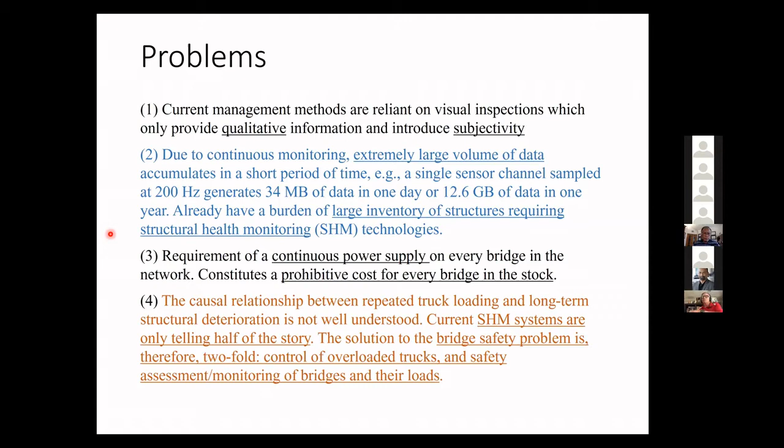Another problem with the current health monitoring system is it only tells you half the story. It gives you information about the health of the bridge, but it doesn't give you the other part of the equation, that is the load itself. And another issue is that once you have the health monitoring system in place, not only is it expensive, it takes time, and you cannot easily remove it and take it to another site.

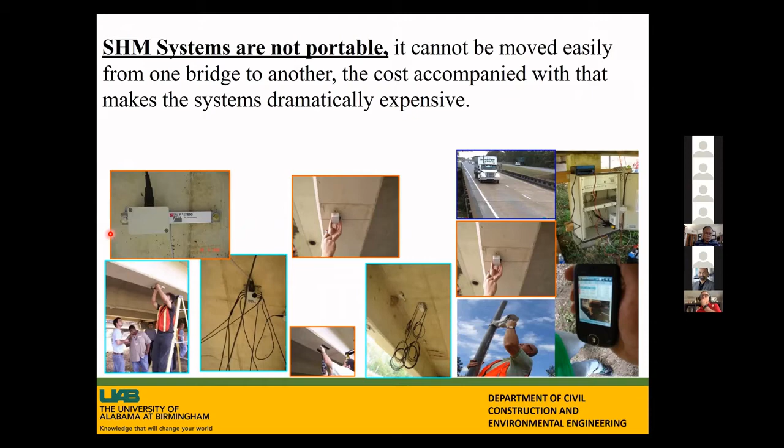So in order to overcome all those challenges, especially the bottleneck of requirement of power supply, the large volume of data being generated, and lack of establishing relationship between the load and the health, we designed a cyber physical system. This is how the system works: you have this sensor in place. And what we did, we set up a landing pad where a drone can fly and sit on it, and it charges all the sensors on the bridge site. And then it also downloads the data.

So it solved these two major problems. One is the power problem, because now you don't need any source of power, because the drone comes every now and then and it charges the battery of the sensor, wakes it up, and then the sensor continues collecting the data. It also solved the data problem because you're not collecting the data all the time. You only collect the data as you need, and the drone comes and collects the data and goes back.

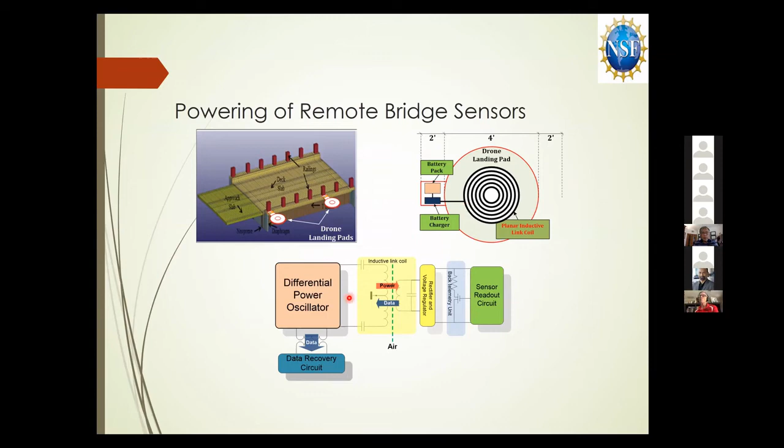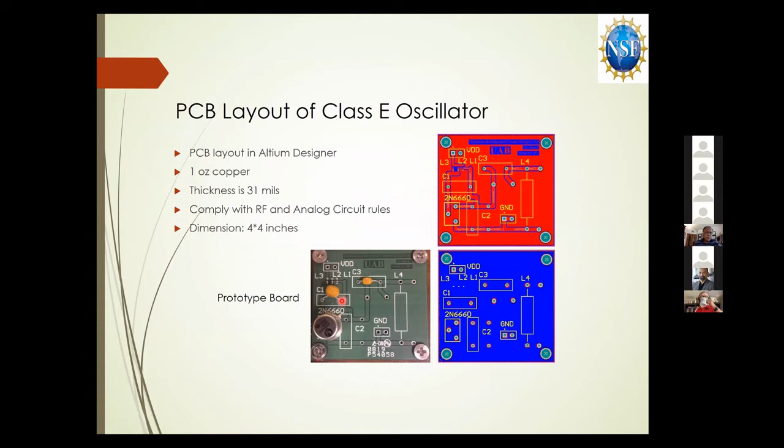So this was a really very interesting problem, and we had to solve this landing pad problem, which is able to not only charge the sensors, but also allow the drone to collect the data. And this is the device that we designed. This is how the landing pad looks, and it has this sensor readout circuit. It has a data recovery circuit, and this is the PCB layout of the oscillators. This is the design and also the prototype board that we manufactured. And this is a receiver unit. We proof tested in the lab, and we could successfully demonstrate that this system works.

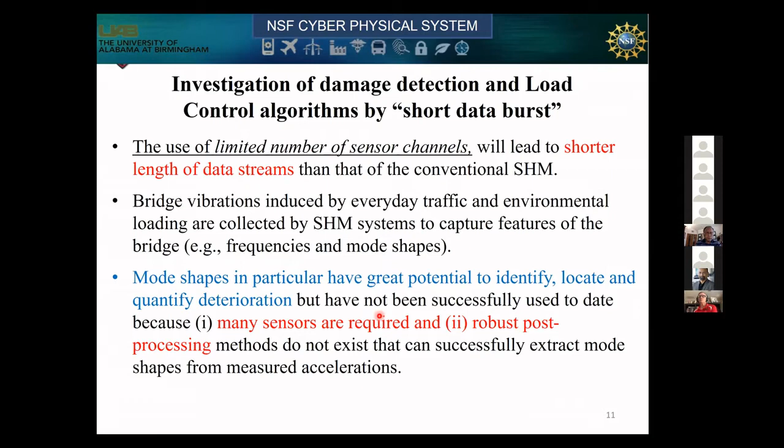But as we solved this large volume data problem, moving into as-needed data collection, it creates another set of problems. The problem is now we have a very limited number of sensor channels, and the data length is shorter than the conventional health monitoring data. As you know, in order to detect the damage in a bridge, you need to establish a very accurate mode shape, and you need many sensors and robust post-processing. So to overcome these challenges, we moved on to the next level of research.

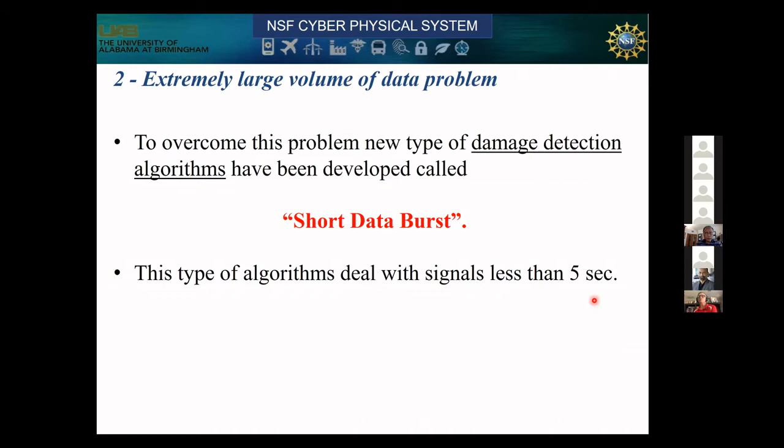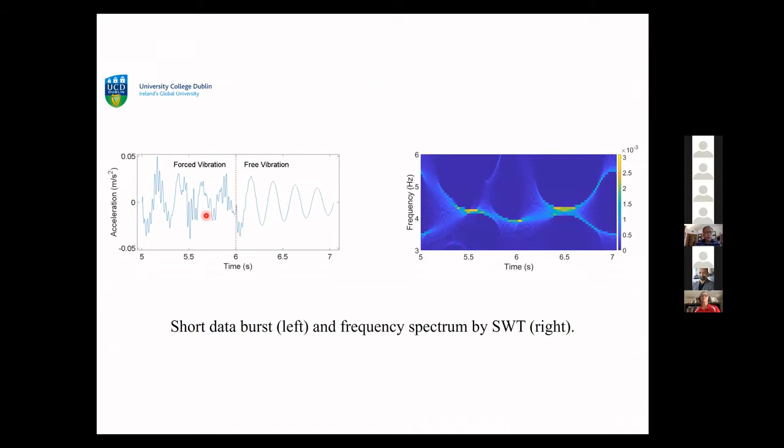It's the damage detection algorithm using the short data burst, meaning a signal that has a duration less than 5 seconds. And the way we handle that, so this is a very short, 1-second duration data, followed by free vibration data. So we had to compensate for the shorter duration so that we get a similar level of damage detection data that a traditional health monitoring system provides. And the way we do it, we extend this data artificially by padding.

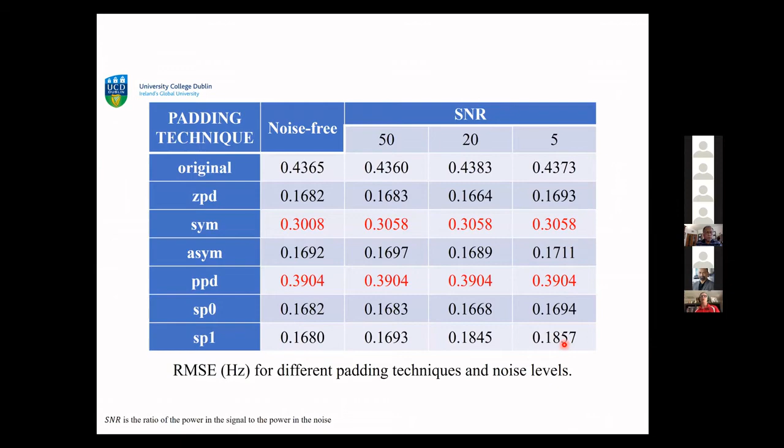Even when we inserted noise into the signal at a very high level, as high as SNR equal to 5, still most of the padding techniques give you an acceptable level of accuracy. So establishing that was a major hurdle for us to overcome. We are actually focusing on some discontinuity issue between forced and free vibrations.

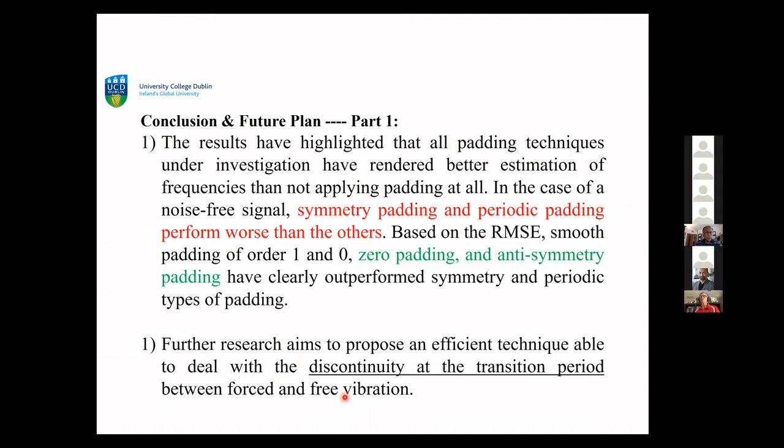Now that we have the power supply problem resolved, data problem resolved, how do we solve the relationship between the loading and structural deterioration that is completely absent in today's health monitoring systems? So again, we look into the same scheme we just developed, but this time we want our sensor not only to give us information about the health of the structures, but also to give us the weight of the truck moving through the bridge. And we call it bridge weigh-in-motion.

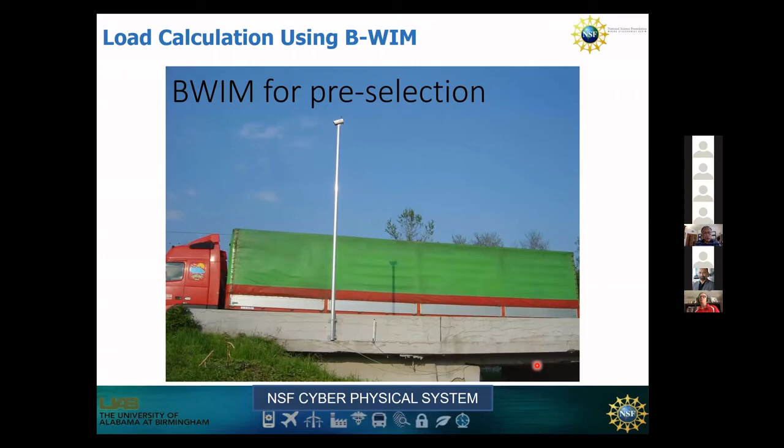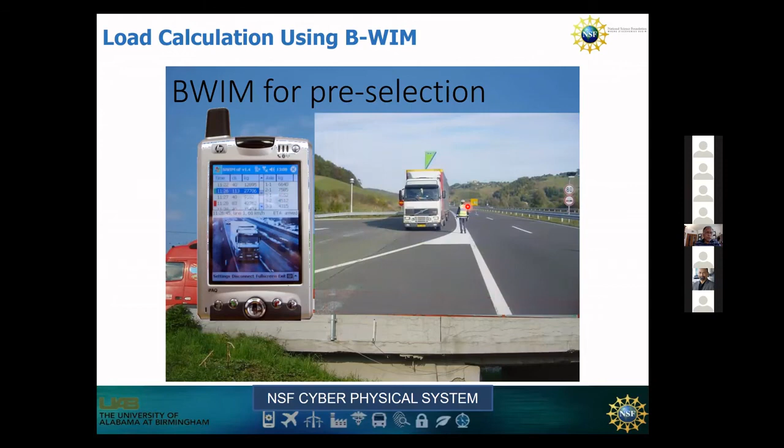This is how it works. So this is the sensor we have below the girder. As the truck goes by, we have a weigh-in-motion algorithm that, based on the strain data, calculates the weight of the truck. And then in real time, it sends the information to a smartphone. And if it's enforceable, the police can actually give it a ticket. But our goal actually was getting the weight information about the load of the truck.

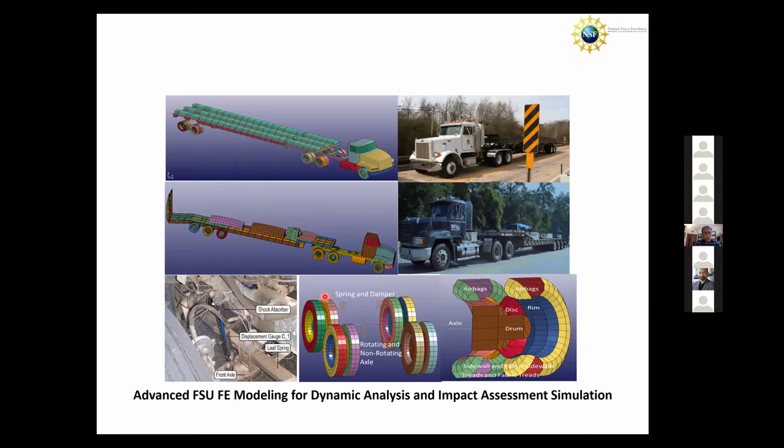So to make it practically possible, we had to get into some high fidelity simulation of the vehicles that includes a serious level of detail in the tire, in the suspension, just to show you some calibration that we had to do. Like for example here, this is the proof test of the suspension systems that was as good as experimental. So we really had to resolve those kinds of details in order to make it workable.

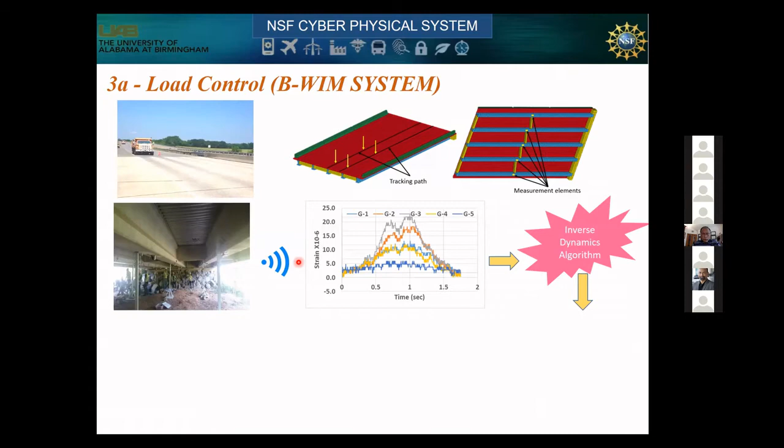And this is really the field test in Georgia that we did. So as the truck goes by, our algorithm works, so we have this wireless strain gauge and accelerometer that gives you real-time data. And in the real-time algorithm, we could calculate the weight of the truck with very reasonable accuracy, less than 3% error, both at the gross weight level, which was a very small error, and even at the axle levels we got a very good weight.

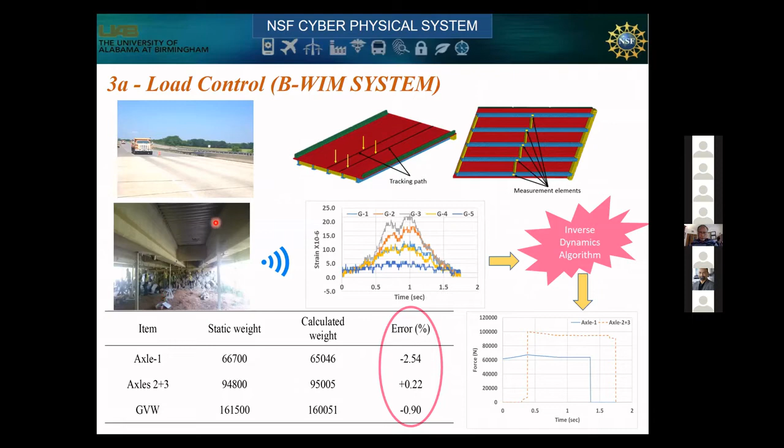Now, all of a sudden, the system that we are proposing not only gives you the information on the health of the girder and the bridge, it also gives you the information on the weight of the load moving through the bridge. So now you have a complete picture of the problem.

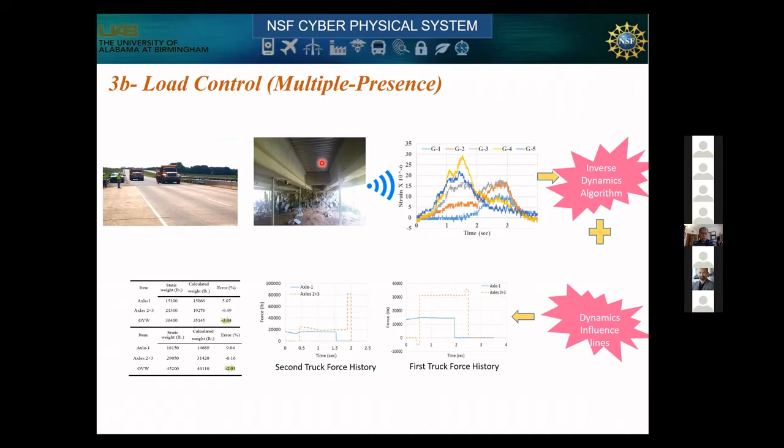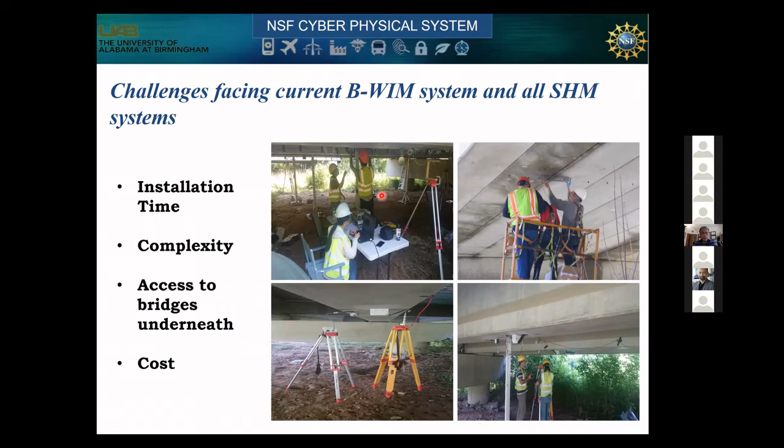However, even though this scheme that I proposed solves the problem of the power, the problem with the data, and the problem with the interaction between the load and the health, still the installation of this kind of system is very problematic. Not only does it take a lot of time, it has a lot of complexity to get it right, and accessing the bridge is another challenge. Of course, cost is very prohibitive. So the next challenge we took: can we really get away with all this mess and make it simple, cost effective, and really reasonable?

So the way we have to do it then, we have to somehow replace these wireless strain gauge sensors with something else. And we have to get away with all that installation time. How can you do that? Well, the drone was the solution. So imagine if we have a drone instead of a sensor that flies with a small accelerometer like this and attaches, like what we see in the Stanford experiment, then instead of collecting the strain gauge in real time, you collect the acceleration in real time.

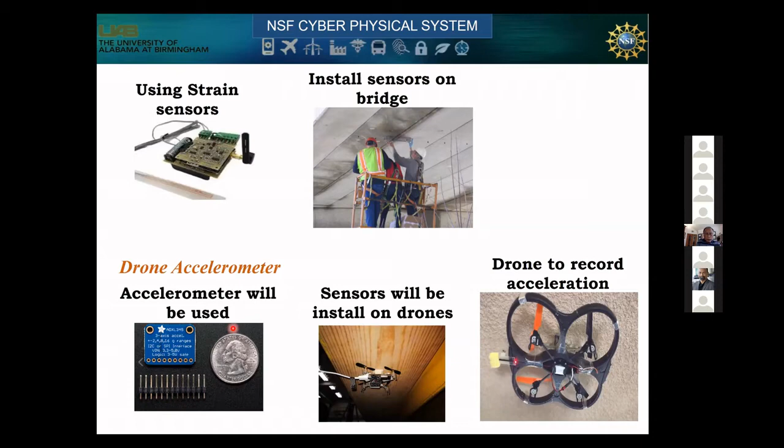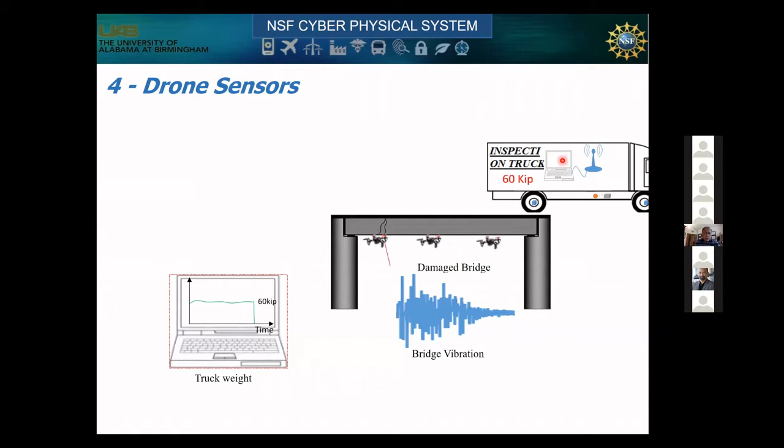And does it work? So then you get away with installing these heavy duty sensors and all that manpower and expensive effort, just letting a drone fly, attach to it, and you're done. Is it possible? But the challenge is then, how can you replace that size of sensor with small sensors and still get good results? So again, as you see, the idea was that those drones are going to fly out, attach themselves to the bridge, and as the truck goes, give you the weight of the truck and at the same time the health information.

So the challenge is then to get a very good acceleration, because if you move from strain gauge to acceleration, then bridge vibration is very sensitive. So your vibration signal has to be very good. So if you use a Silicon Designs, which is very expensive and heavy duty, it's going to give you a very good vibration signal.

But if you want a drone with an accelerometer, like the small sensor you have in a smartphone, then it's not going to give you as good data as this Silicon Designs sensor is going to give you. So it is impossible to get good data that's going to be useful to get the weight of the truck and the health of the bridge.

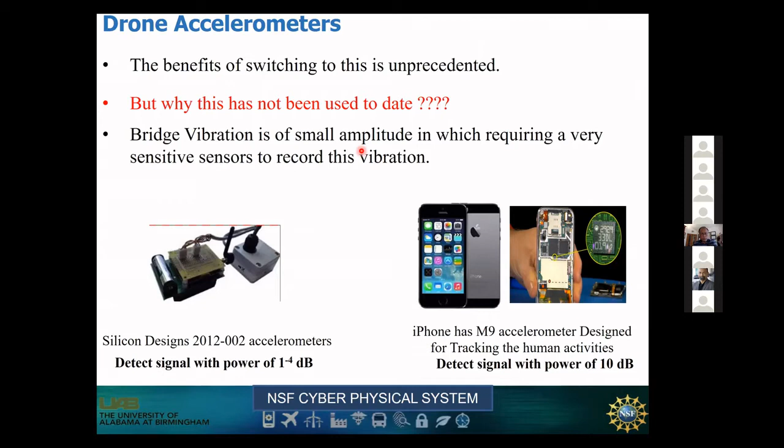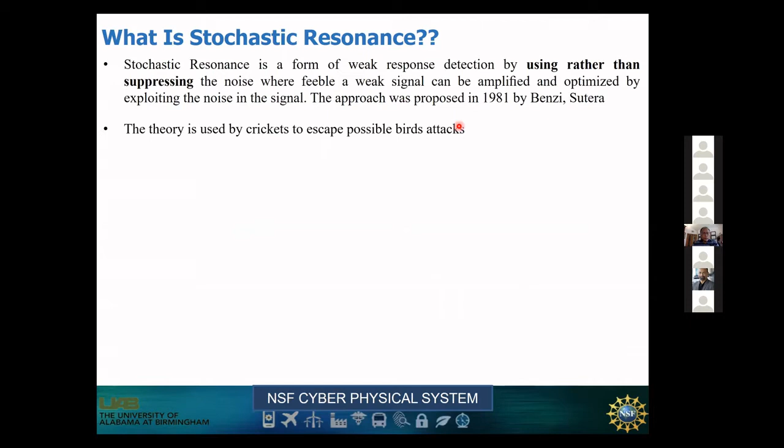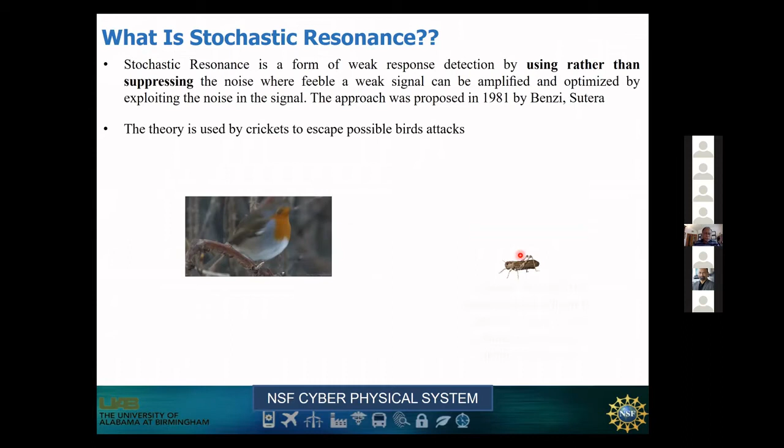So the way we do it, we use a stochastic resonance algorithm invented by Benzi, and he was inspired by how the cricket escapes a bird attack. To explain what that means, his algorithm was developed based on the cricket. When it sees a bird, it sends a signal to the bird, and the signal comes back. The signal the cricket is looking for is the signal from the bird, and that is very weak compared to the environmental vibration. So it artificially tunes it, amplifies it, and understands that the bird is flying towards it. So it's happy and runs away, right?

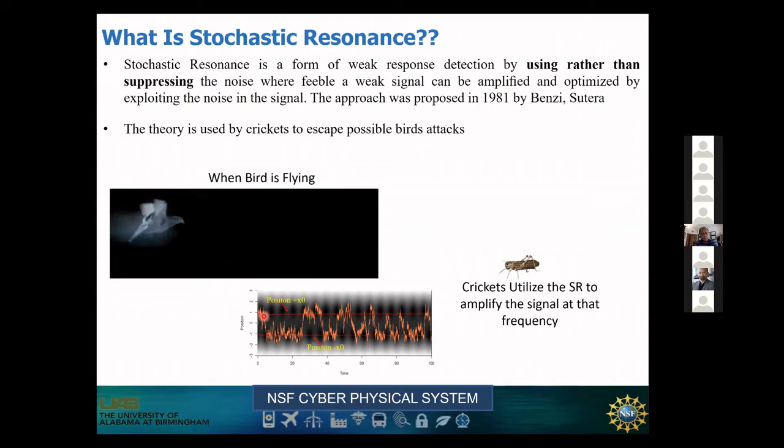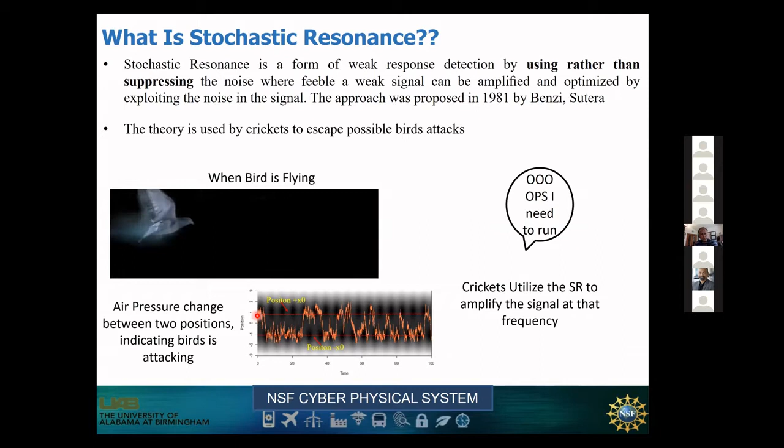But if the bird is coming towards the cricket, again it utilizes stochastic resonance and amplifies the weak signal coming from the bird that it is looking for. And now it can see the two pressure signals from the two wings of the bird, anticipates the problem, and runs away. So this intriguing theory was understood by Benzi, and he developed this idea of tuning up the weak signal with a resonance algorithm, amplifying it so that you can get good data. That involves the movement of a heavily damped mass in a specific potential well.

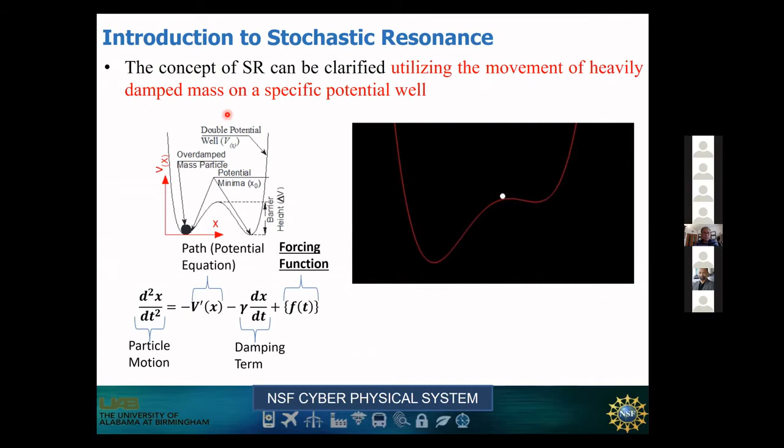So based on that theory from Benzi, we developed our algorithm. We now have this noisy signal from the smartphone sensor. Then we are able to noise-tune the weak signal we are looking for using stochastic resonance, and we were able to extract that weak signal successfully.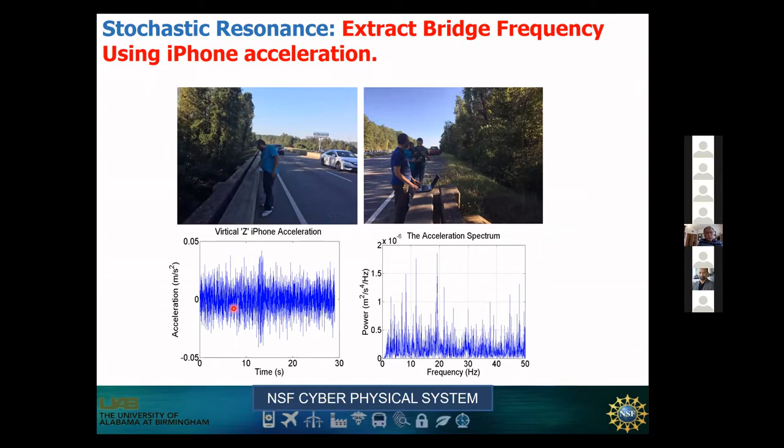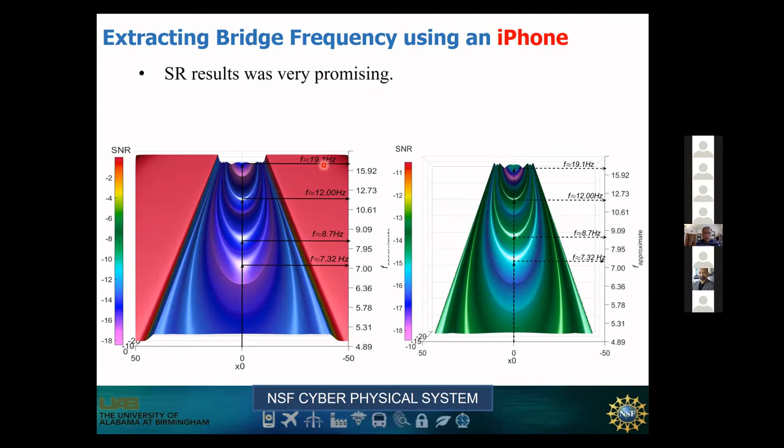To give you a practical example, this is a bridge that we are investigating, and these are my students. They are putting the smartphone not on the bridge or underneath the bridge, just on the guardrail. Putting it on the guardrail, we got this noisy signal. But once we applied the algorithm, we see that the bridge frequency we observed is nearly 100% accurate compared to the actual bridge vibration. So 100% matched. And this is some of the comparison between the extracted signal and the first bridge frequency, and you can see the accuracy is almost 100%.

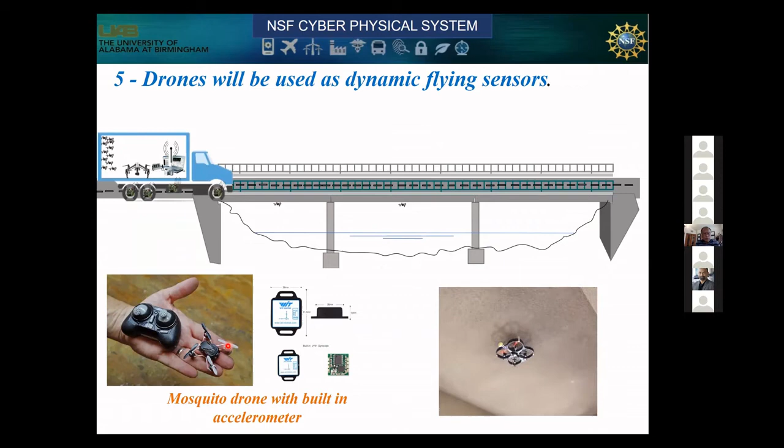Now that we could do that, we have a system where we can have the drone with an accelerometer. As you can see how small this drone is, it has inside it this very little smartphone sensor, and it can fly in. Now, by attaching itself to the girder, it can give you not only the information of the weight of the truck, it will give you the health of the bridge. So that kind of sealed the deal.

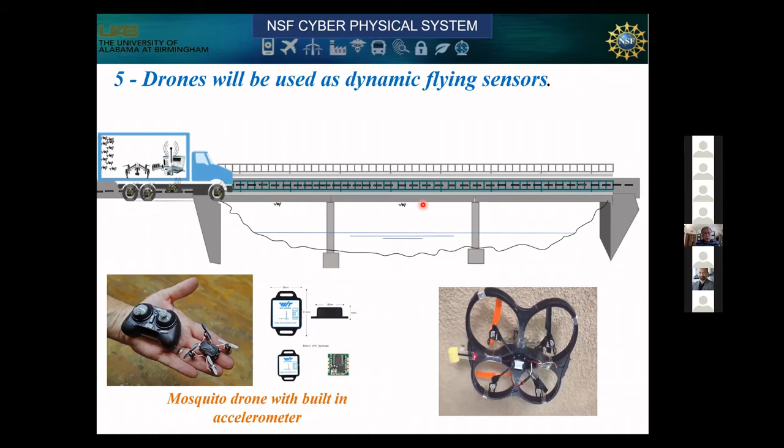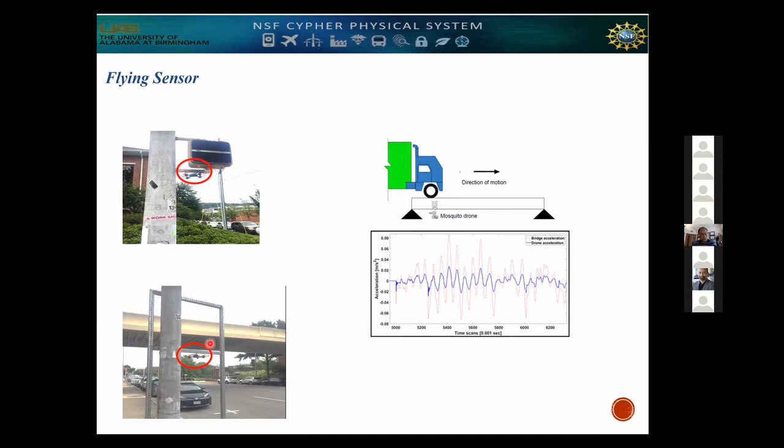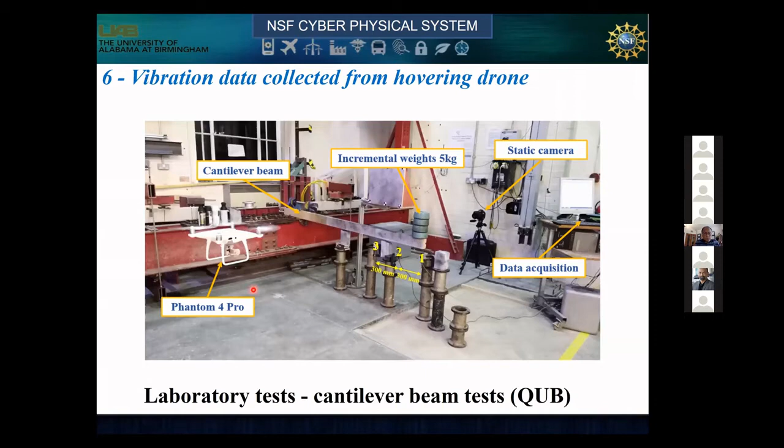But once we apply our hovering drone algorithm, the data from the drone matches very close to the displacement sensor. So a hovering drone can collect the deformation data. But we are looking for acceleration, remember?

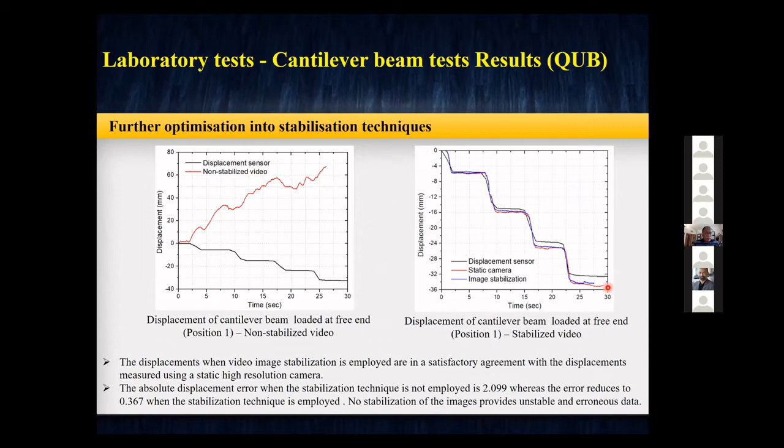The two others dance around, attach to the next segment, and you get the next segment of the mode shape. And still, it doesn't see any problem compared to the original one. And it keeps on moving till it finds out from the global mode shape there is no problem. However, if there's a problem, the first set of drones compares the mode shape with the healthy one, and you anticipate a problem, then they zoom in, and they zoom in further till they find out the exact damage locations.

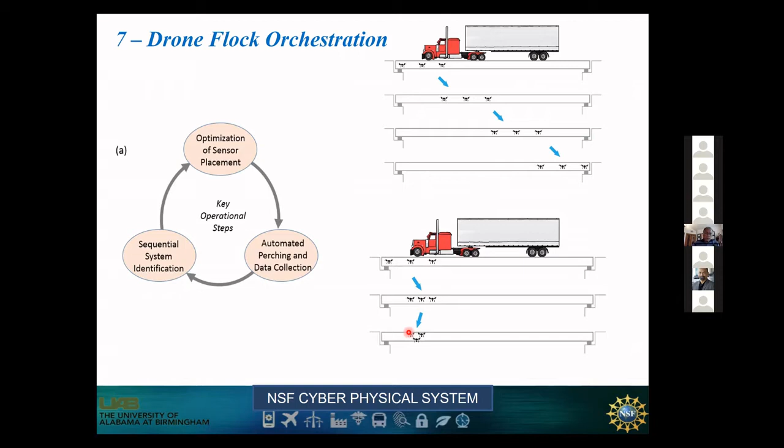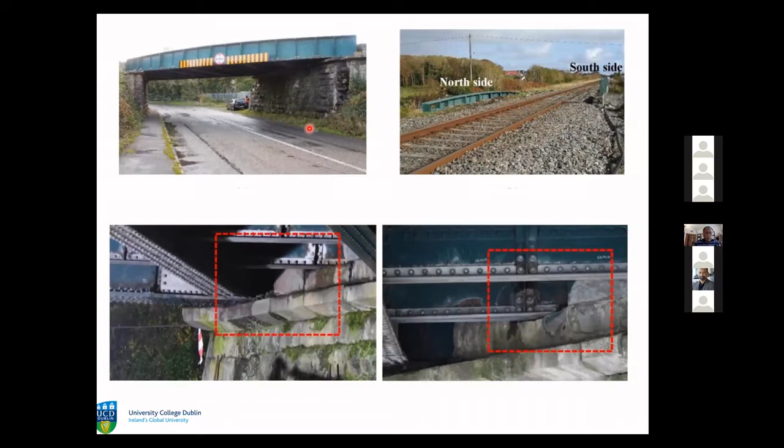So what we did, again, we attached these two sensors, collected the signal data, then moved them one step at a time until the end of the bridge, and we got the complete mode shape of this bridge before and after the fixing. Then we can see a clear difference of the mode shape before and after the rehabilitation, meaning that if something happened to the bridge during an earthquake, flood or hurricane, and you don't know if the bridge is safe or not, we could fly those drones and tell by comparing the mode shape with the previous one if something went wrong.

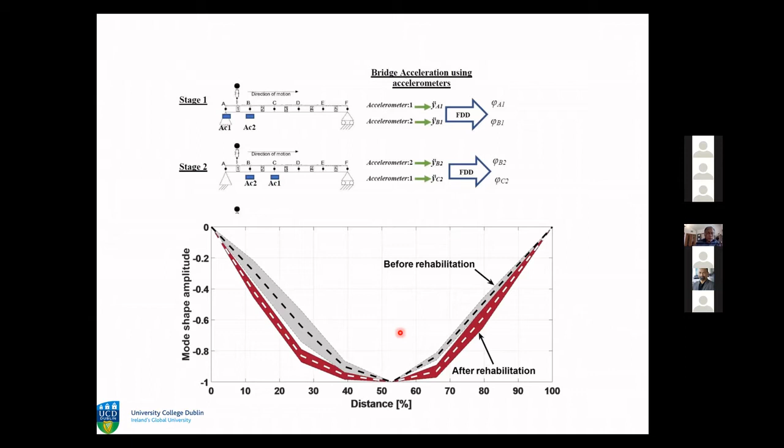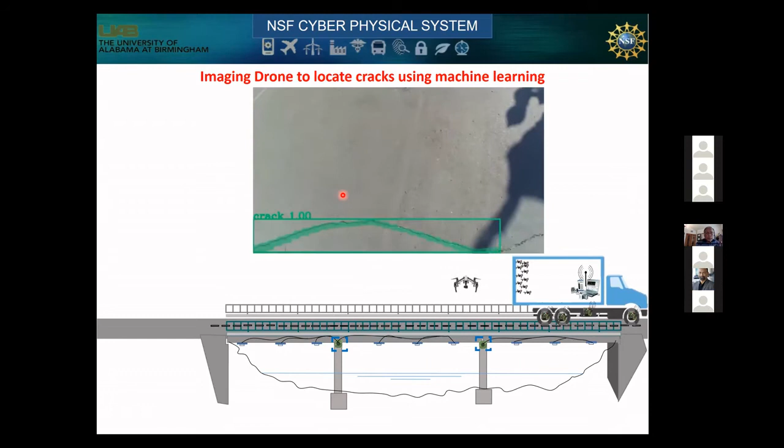Then we moved on to the next level. How about instead of getting the vibration signal, can we very accurately get the image of the damage? To do that, again, we have this drone fly around the bridge looking for cracks. As you see, it can identify the crack and it can differentiate between the shadow and the crack. Okay, so it can do that. It even gives you the location, the crack width, and other information.

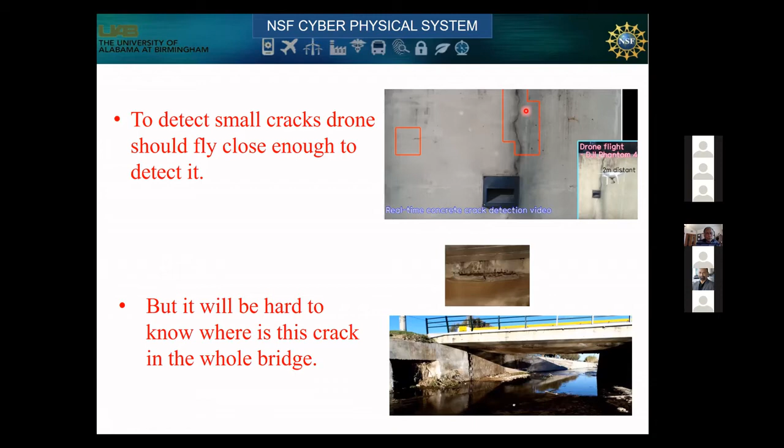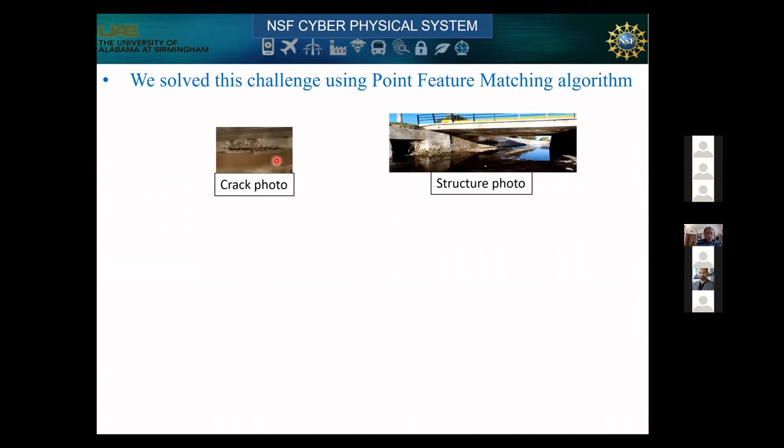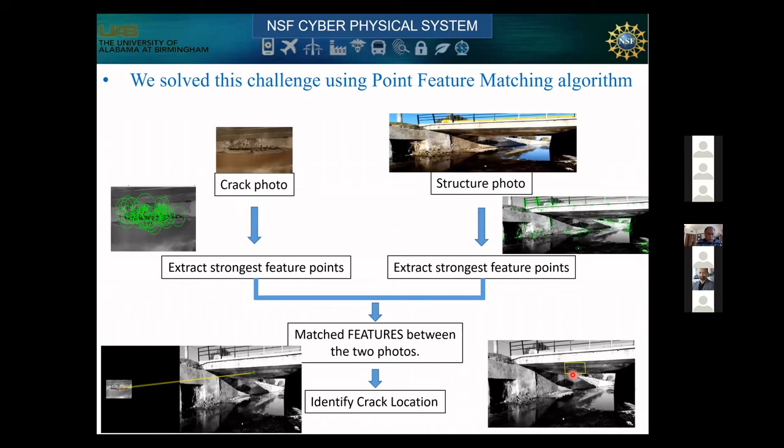To give you a real-life example of how this point feature matching algorithm works: here you have a bridge. The drone identifies the crack, and it also identifies some of the strongest features of the crack and of the bridge itself. Then by using machine learning feature comparison, it could give you not only the image of the crack, but also its location. Now we're also looking into infrared thermography for that purpose.

Now that we have this flyby technology working, I'm going to move on to the drive-by technology. This is much cooler, actually. How does it work? Imagine an undamaged bridge and your inspection vehicle goes by; it tells you that this bridge has no problem.

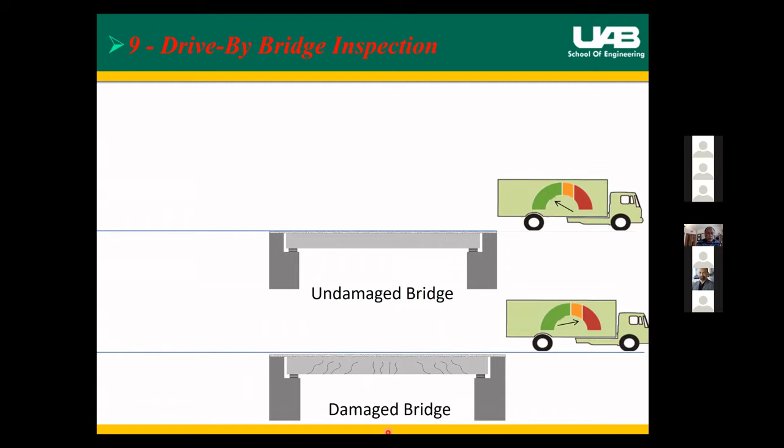Or after an earthquake or a hurricane, you send the inspection vehicles and it says, oh, there's a problem in the bridge. Because if you could do that, then it solves the power problem, the data problem. It's like moving sensors, no sensor required, it's economy, simplicity. So it can be a fantastic complement to the system that I propose as a flyby.

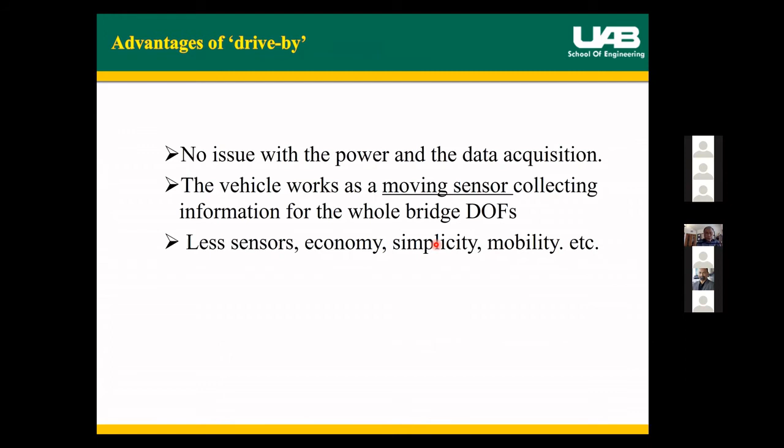Now, how does the drive-by work? The way it works, it can eliminate all the problems: the power supply, the data, and interaction. Why? Because if you look at the interaction equation of a bridge with a vehicle moving over a beam, for example here, and you look at the response of this vehicle, this is the response of the vehicle. And right in the response, you can see hidden is the vibration property of the bridge itself.

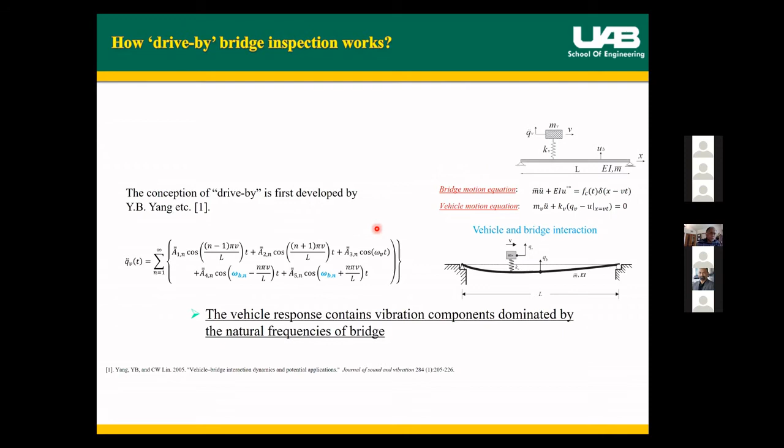So what is cool, if we can extract this vibration property of the bridge from the signal you receive from the vehicle, that's it. That means somehow we have to identify this vibration characteristic of the bridge from the response of the vehicle. Meaning you need to extract the bridge frequency, the bridge damping, the mode shape, and all from there so that you can have a discontinuity signal to give you the location of the damage and extent of the damage.

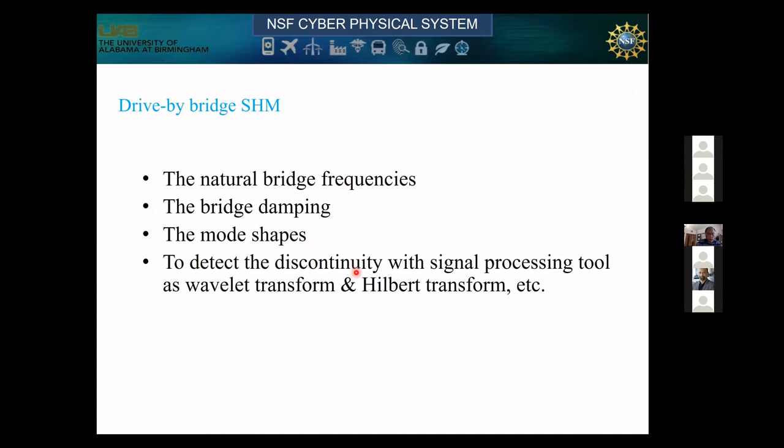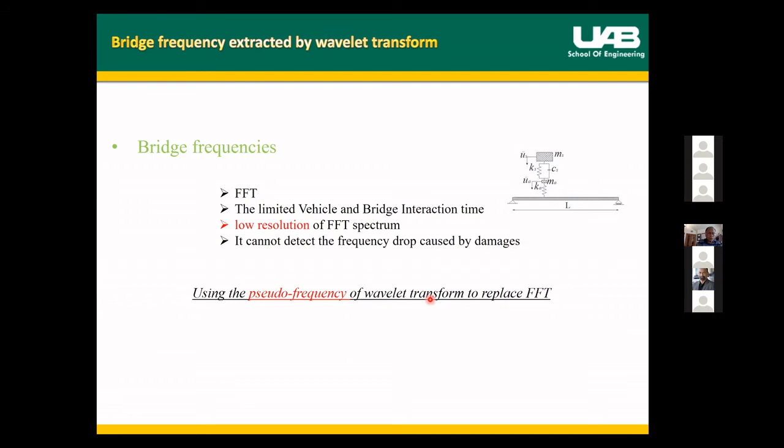Now, traditionally, the fast Fourier transform doesn't work here because it gives you very low resolution and it's not sensitive enough to detect the frequency drop that will be caused by the damage. So what we did, we investigated the pseudo frequency of the wavelet transform. And this is very cool because it not only gives you the frequency domain solution, but it also keeps the information in the time domain.

So to give you some example, this is the simulation problem we have of a bridge, a 15-meter bridge. And this is the vehicle property. These are really practical, actual data on the vehicle. And also this is some bridge property data. So once we run the simulations, we could actually calculate the frequency of the bridge exactly comparable to theory. And also we identified there's no resolution limitation. So this works quite well.

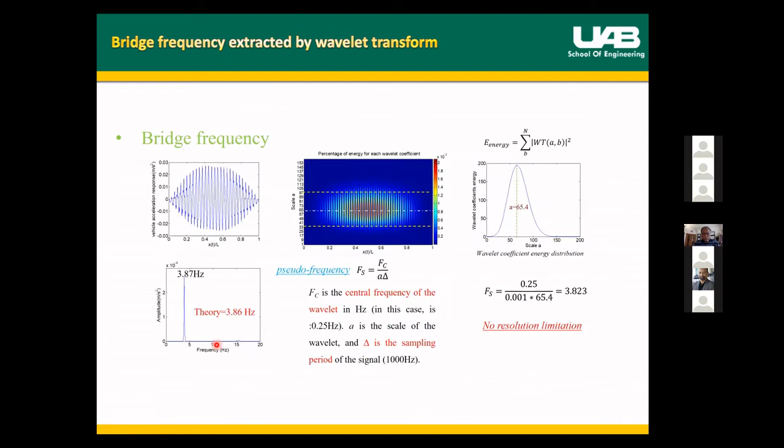Then we impose some crack into the middle of the beam, 20%, 40%, 60% crack, meaning we take the material out. And then we see, interestingly, this is the intact bridge, and depending on the level of the damage, 20% damage, 40% damage, 60% damage in the cross section, we could clearly see the drop of the frequency, meaning that we will be able to see if something went wrong in that bridge location.

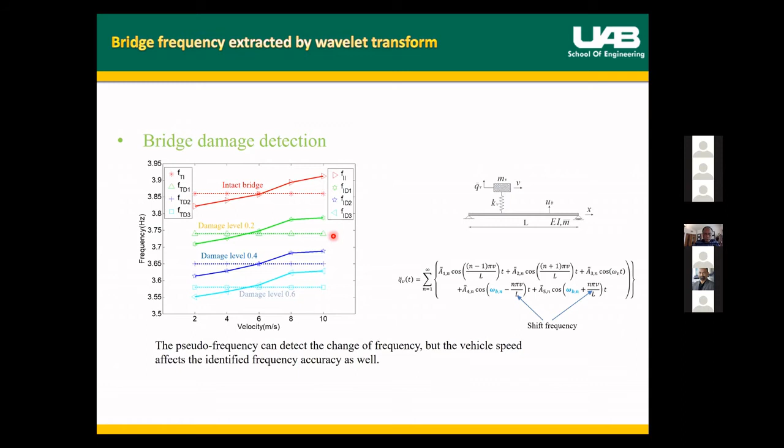But the challenge actually is that this calculation is a function of the velocity of the vehicle, meaning that this frequency calculation is not actually a good calculation. It depends on the velocity of the vehicle. The higher the vehicle speed, the lower the frequency. So this is one significant limitation we need to overcome.

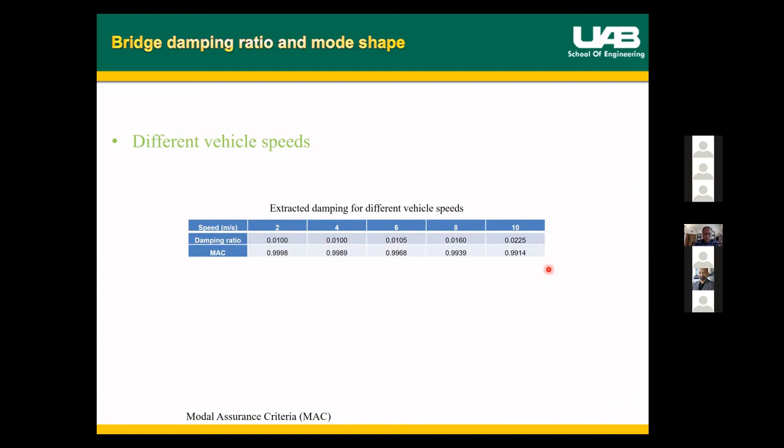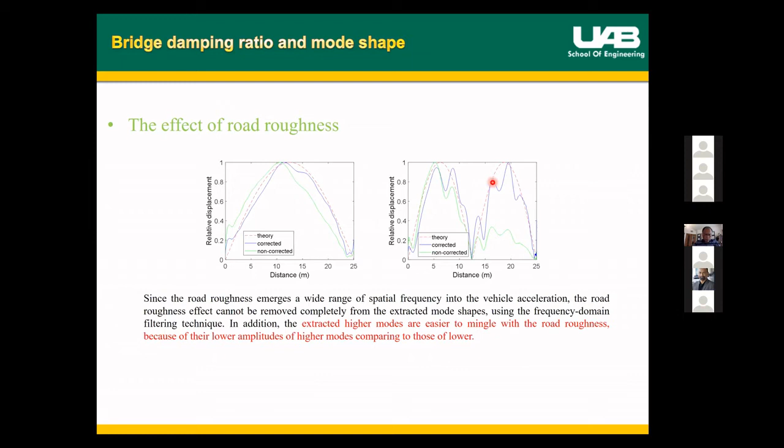However, in order to overcome those problems with the velocity and the surface roughness, we developed a damage index calculation, which is the sum of the difference between the undamaged and damaged bridge in terms of the mode shape squared. And that actually eliminates much of the problem.

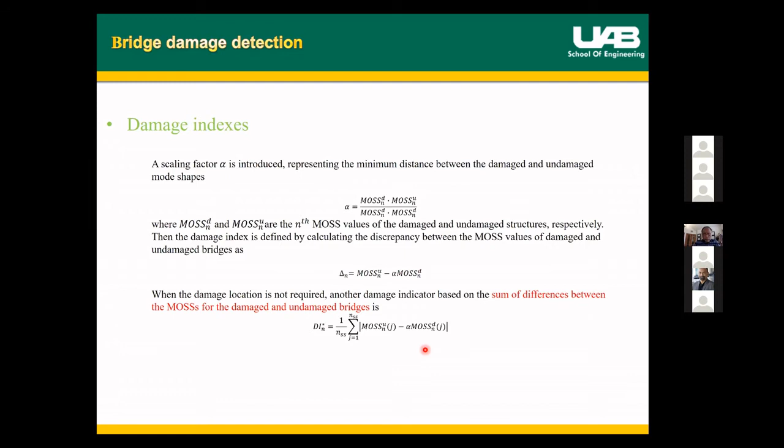To give an example, the steps we follow: you get the frequency of the bridge and the damping ratio from the vibration test or smartphone, as I showed you before. Then you calculate the amplitude respective of this frequency. Then you reformulate the amplitude, including the damping and other features, and then you calculate the damage index. So let me give an example. This is a simulation example, the same vehicle and bridge property. Then what we did, at the distance of 6 meters, we damaged the bridge 10%, 30%, and 50% of the cross section.

We take it away. So if you see on the mode shape, you don't see much of a difference between the healthy one and the damaged one. But using our damage index calculations, you see right at the location of the 6 meter where the damage is, you can see a clear peak, and the straight line is the healthy one.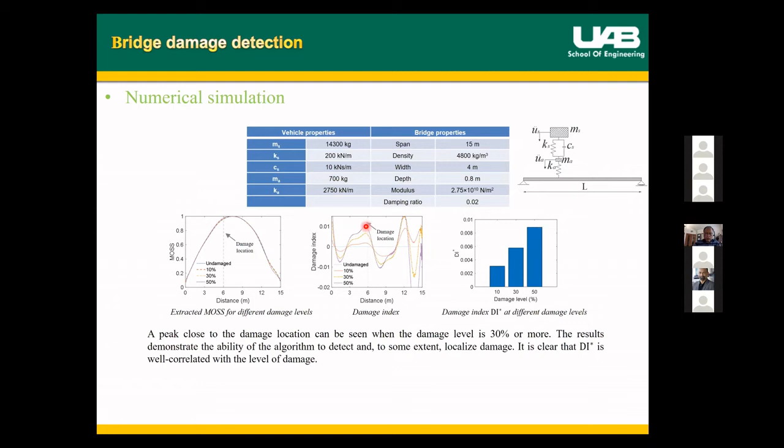So meaning that if you can collect this information from the drive-by vehicle, seeing a peak in a certain location would tell you something went wrong at that particular location. And also the peak is directly a function of the damage index. So the higher the damage, the higher the peak. It works. And in real life, you're gonna have a lot of noise.

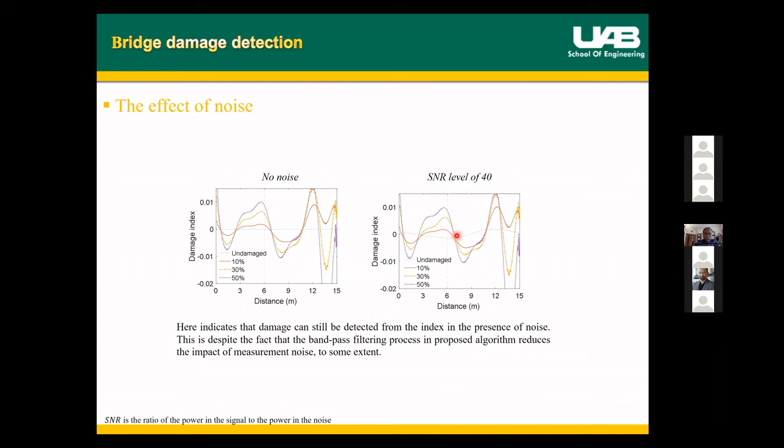So we also insert some noise into the signal in our simulations, but again, you see the peak still remains, and we can clearly see this peak directing us that something went wrong at that distance. So how about the real experiment then? In order to test this algorithm, we went to some tests. So this is the test setup in Japan we used.

So this is the bridge, a scale bridge, and then the vehicle moving. And we have the sensor system in place. This is the accelerating span, this is the span where we are testing the system, and this is the decelerating span. So in segment number 2, we're gonna impose some damage there. And we're gonna also run different velocities at different levels.

Here, this is the element we're gonna damage. So for the first damage, we removed 5 millimeters of the flange. For the second damage, we took 10 millimeters of the flange of the beam. And the third one, we took 15 millimeters of flange out of the beam. So we have this damage now on the sections. Then again, as we see, the level of accuracy of the mode shape drops with the high level of damage.

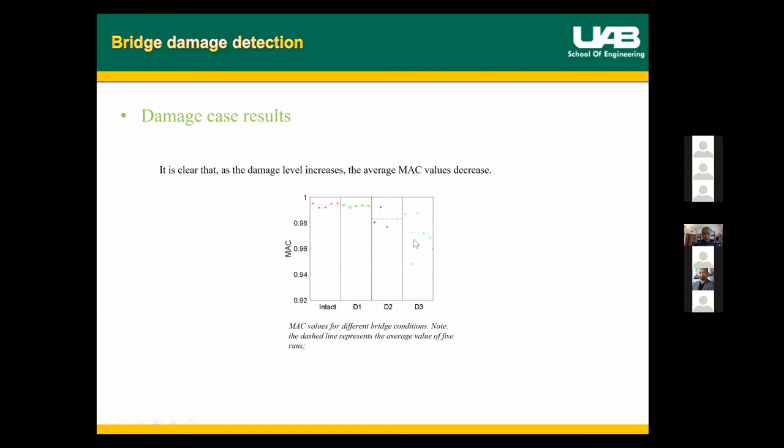But if you compare the mode shape now at different levels of damage, D1 is the smaller damage, then medium damage, and high level damage. And the damage is between the 2 to 2.5 segment. You can see some anomaly in the mode shape. But if you look at the damage index, it clearly tells you in that location that the peaks are different.

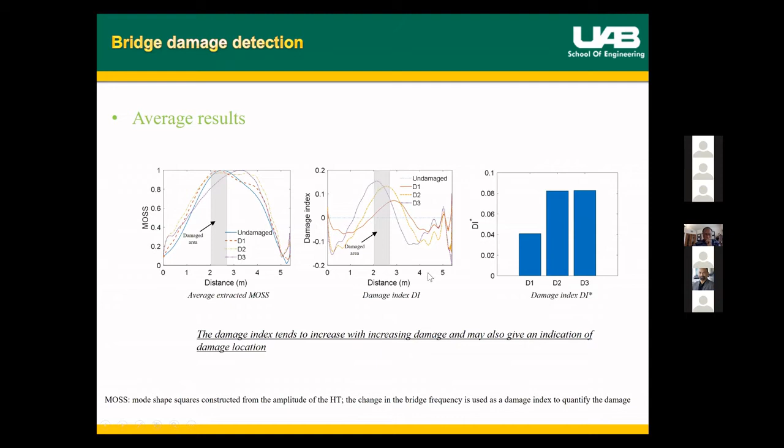So this is if you have local damage, really located in a certain location of the bridge. However, the global damage, meaning sometimes you have a bridge like this, sitting on 4 piers. Sometimes due to scour, the stiffness of the pier gets reduced. Can you pick up the change of mode shape from the reduction of the stiffness of the pier from the drive-by? So that was our main goal, which you can call global damage.

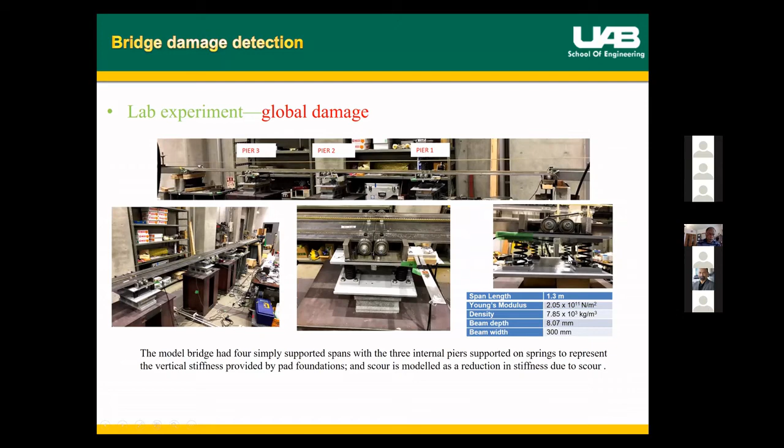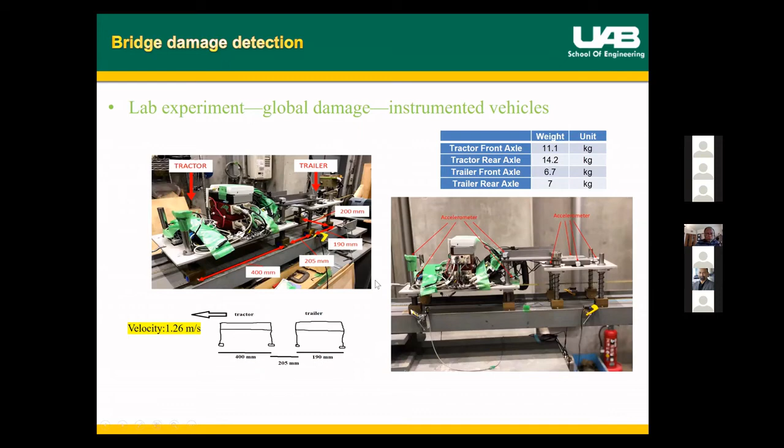So in order to do that, this is the vehicle, again equipped with the accelerometer that we're going to be collecting with. And these are the bridge piers here. You can see the first pier, second pier, third pier, and those are the springs. So what we did, we reduced the stiffness of pier 2 and pier 3 by 25% and 50%. We take the spring, reduce the stiffness 25%, and then 50%. Same thing we did for pier 3.

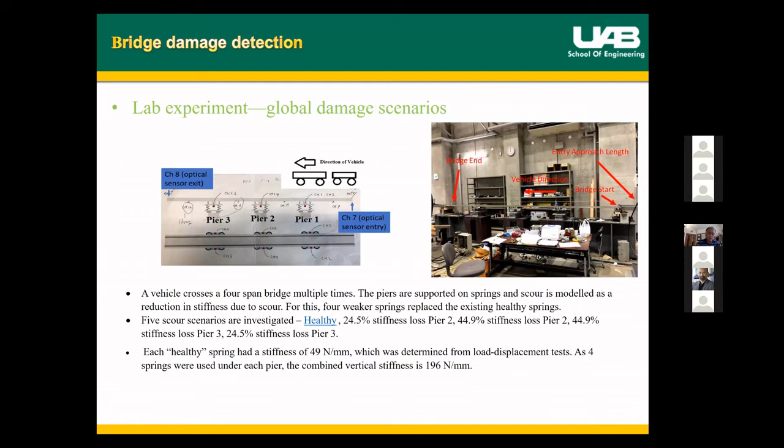Now we'd like to see if this vehicle can pick up those changes resulting from stiffness changes, which can happen due to scouring. And we tried it for very different speeds. What we noticed is that we could reproduce the mode shape repeatedly when we ran 5, 10 times, especially for the lower mode. And for the higher mode, it was erratic. However, it did not impact our damage index calculation.

For pier 3, the damage is actually located at around 4 meters, that's the bridge pier 3. Remember, we have a stiffness change of 25% and 50%. It clearly showed up here. For 25%, we have this blue graph, and for 50% we can see the red one. So imagine you have a vehicle drive through the bridge, and you see those peaks in a certain location, you immediately know that your bridge pier has some compromised stiffness.

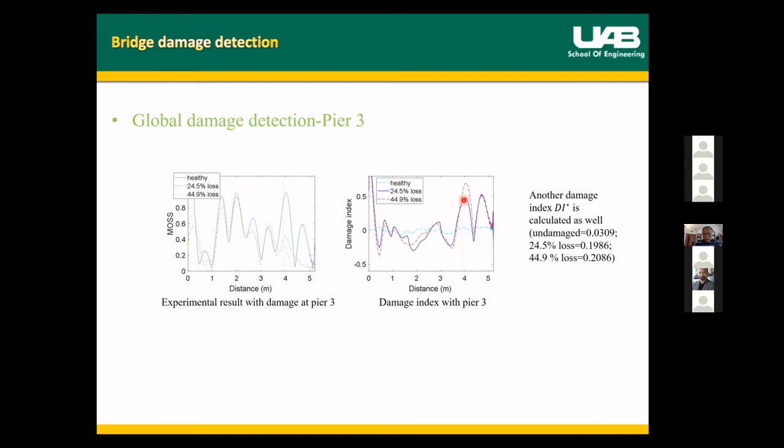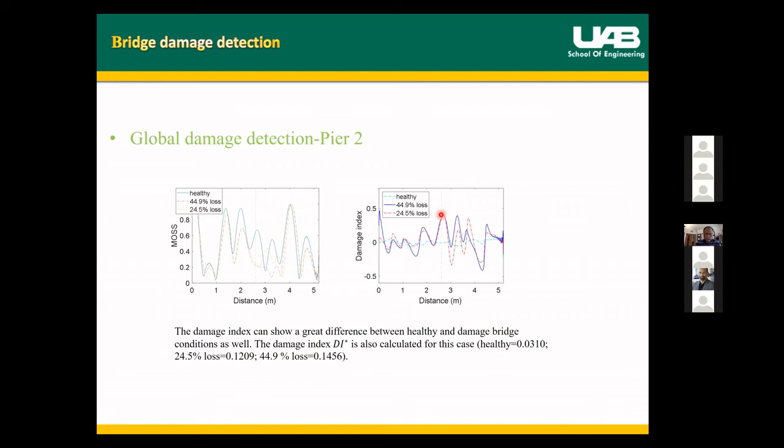And we see the similar situation in the bridge pier 2, which is located around 2.75, and you can see the jump of the peak giving you some indication that something went wrong. So this can be applied if you have a problem with the settlement or the cracking on the column, or you have some exposed reinforcements, or something went wrong in the bridge pier or bridge padding, or an elastomeric bearing problem. Any global change, it should be able to pick it up.

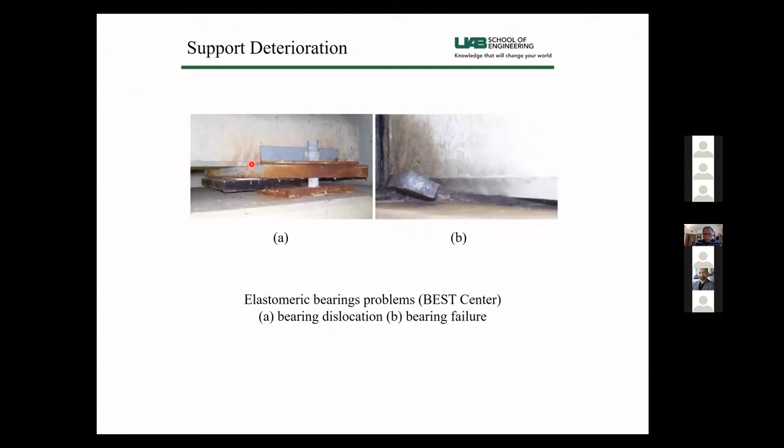So in summary, what I mentioned in this presentation is that we know we have the problem today with bridge inspections, and complementing the inspector with health monitoring is a great idea. But as we say, we suffer from the power supply problem, the large volume data problem, and understanding the load and performance issues. And I think we came a long way in this couple of projects by establishing that flyby monitoring with the drone has a significant potential, as you saw.

And we also developed a drone charging pad and flyby drone sensor; both of them would be a major step forward, no doubt. And we also noticed that quality and efficiency can be much improved by having a high quality camera and processor speed. And we also demonstrated how we developed an algorithm for a bridge weigh-in-motion system, where you can get acceleration data from the bridge to give you in real time the weight of the truck.

And we showed you how we can get damage detection on the fly, and also vibration sensing by hovering drone. And last but not least, we demonstrated the drive-by monitoring system, how it would be able to give you information about the local damage along with the global damage. However, all of those are demonstrated in a very limited way. So I think we need to do more field testing to demonstrate their success. And we really need very high-speed processors that we're currently looking at.